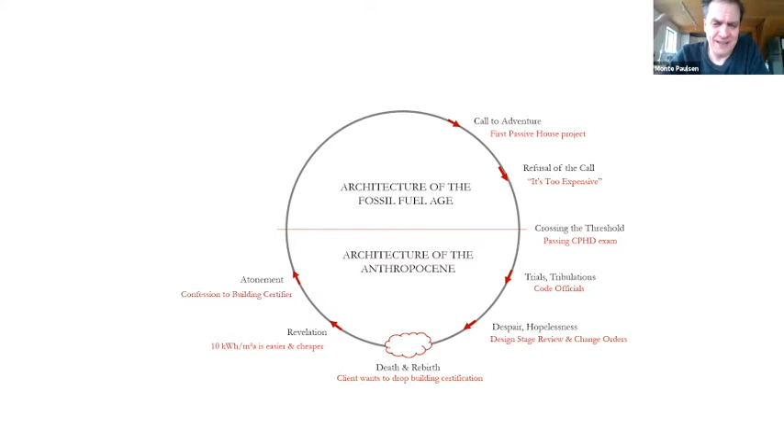Pushing the target lower than the minimum requirement generally makes the project easier, not more difficult. There is, of course, that period of atonement, much like confession. In this case, it often comes in the form of confession to a building certifier. This is what I tried to do. It didn't work. Here's what we're going to try. How can we work this out?

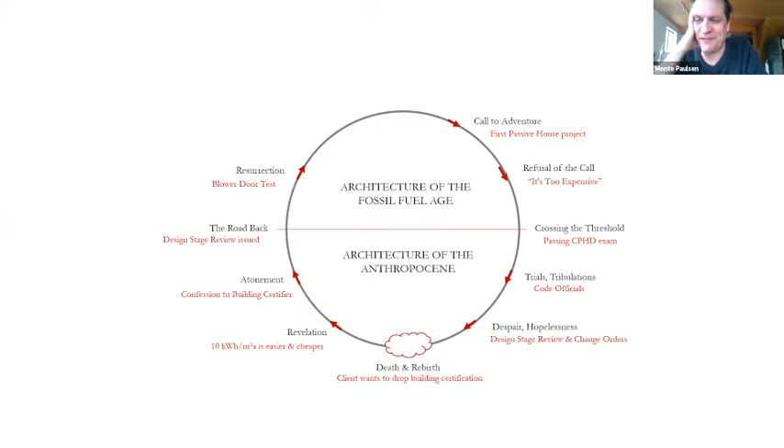The road back begins when that design stage review or pre-certification is issued. We see resurrection within sight when we finally pass a blower door test. And ultimately, we're able to return to our teams with new gifts in the form of a building certification plaque.

What I want to say is, if you have experienced anything like this on your first Passive House project, you're right where you're supposed to be. We all went through this. Our first projects were all really hard. They were challenging. They felt like hero's journeys. You should applaud yourself and feel comfortable if any of this makes sense.

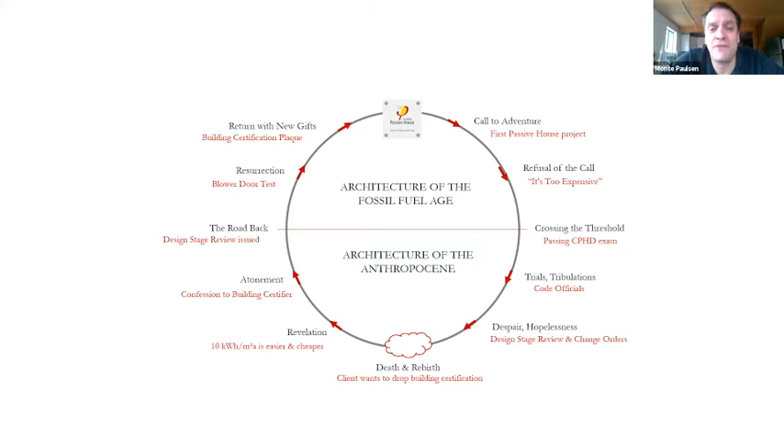The reality, as Prudence and so many others here can tell you, is there's your first Passive House and then there's all the rest. It gets far, far simpler the second time around. It gets wildly simpler the third, fourth, fifth, sixth time around. And by the time you do a few million square feet, it just seems like the only way to do anything. So I want to welcome you all, urge you to embrace the hardship, embrace the difficulty, see the humor in it, see that what you're doing matters, and give each other a hug.

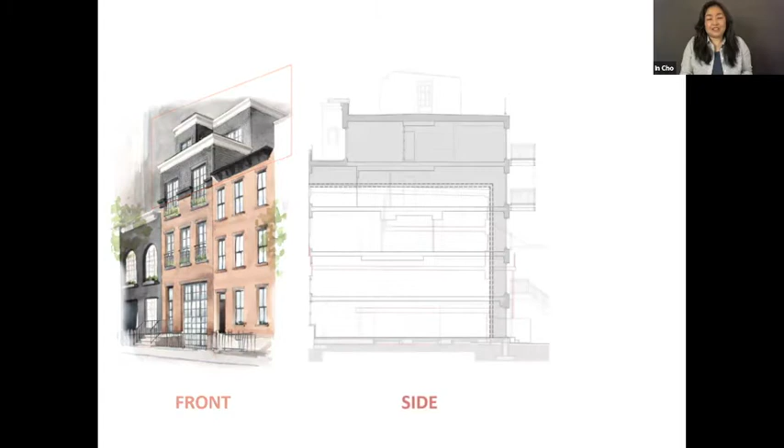But as fate would have it, just as we were finishing the bid set for the following morning, Sudha and Anil called us and asked us to increase the scope of work. And this changed everything. This led to a 1.5-story vertical addition, new increased floor-to-floor heights, and a full rear horizontal extension.

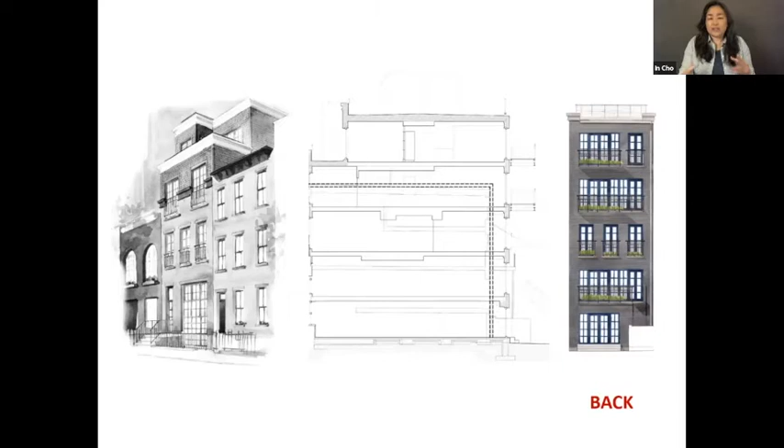Now, while it would have been easier for us to continue with conventional building strategies this far into the project, knowing that now we were more actively engaged to design the building envelope, and to address issues of building science such as preventing condensation and mold, and knowing what our clients desired the most, all of this led us to consider the significant benefits of passive house design.

And thankfully, to the open-mindedness and faith of our clients, Sudha and Anil, and with the support of the Passive House Institute, Passive House Academy, 475, and the rest of the entire Passive House community, we began our journey into this Passive House retrofit.

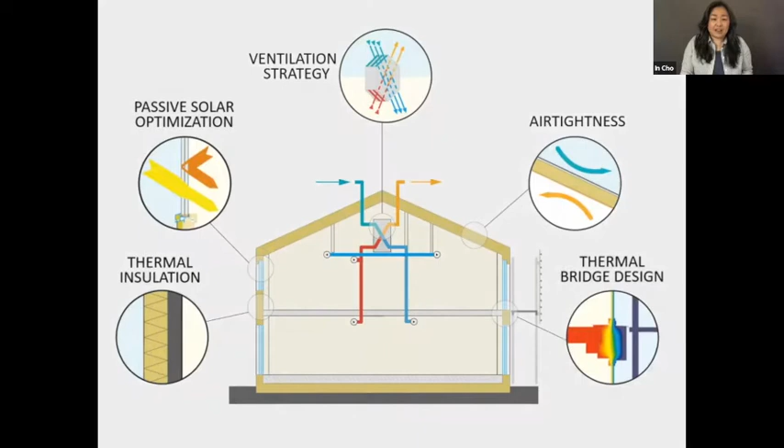Among the 5 principles of Passive House, 3 of these principles were particularly challenging for our project, and this required a lot of thinking outside the box in order to meet the requirements of the Passive House EnerPHit standards. The first of these was the passive solar optimization.

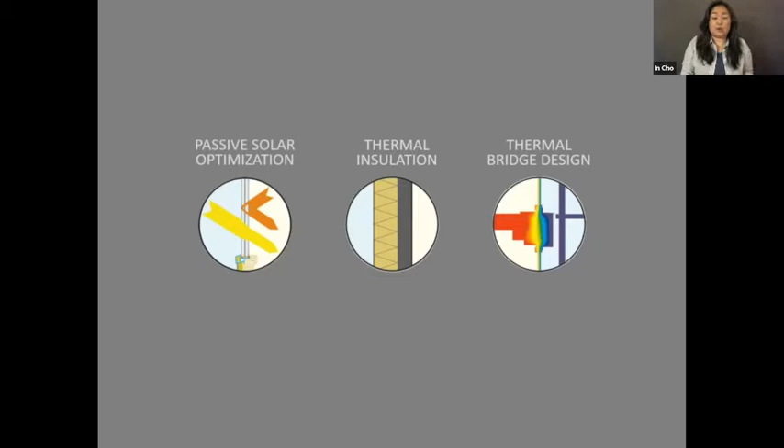Due to our 2 very tall neighbors to the south of us, we had only 1 hour of direct winter sunlight to rely on for our passive solar heat gain. And this was not sufficient to meet the full passive house requirements, such as for space heating demand, which contributed to directing us in certifying under the EnerPHit component certification.

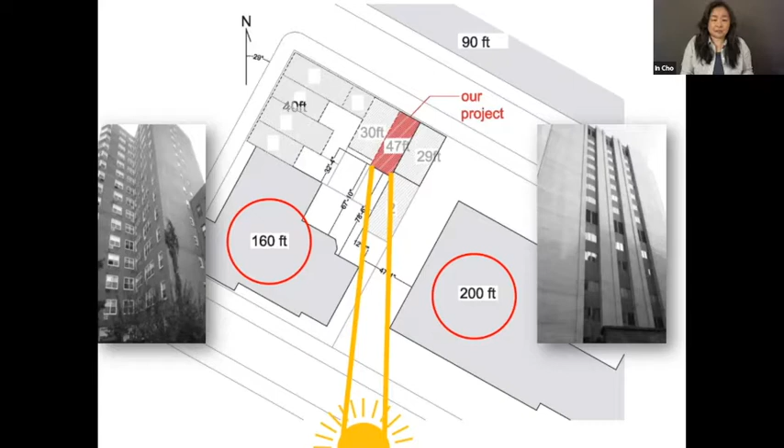And that gave us more leeway for situations that we could not readily control, such as this. It also did not meet our client's desire for abundant sunlight. So all of this placed a lot more burden on the building envelope's thermal performance to compensate for the lack of solar heat gain during the wintertime.

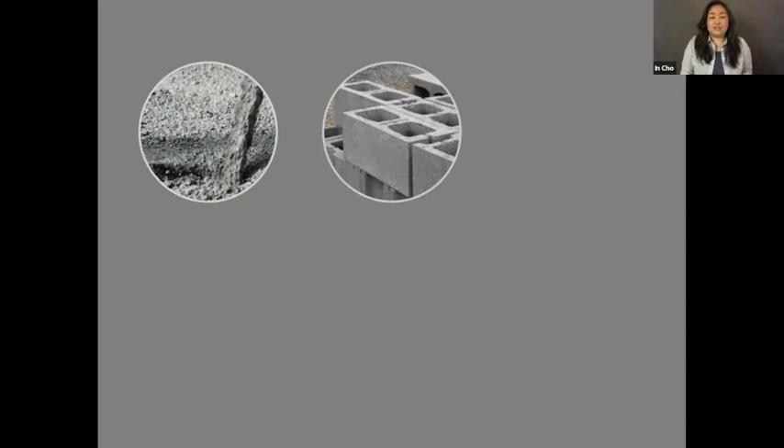So through a lot of research in our studio to address this challenge, we developed a mosaic of different building materials, different building assemblies, which were poured in place concrete, masonry units, brick, structural steel, wood and light gauge metal framing, and exterior rain screen.

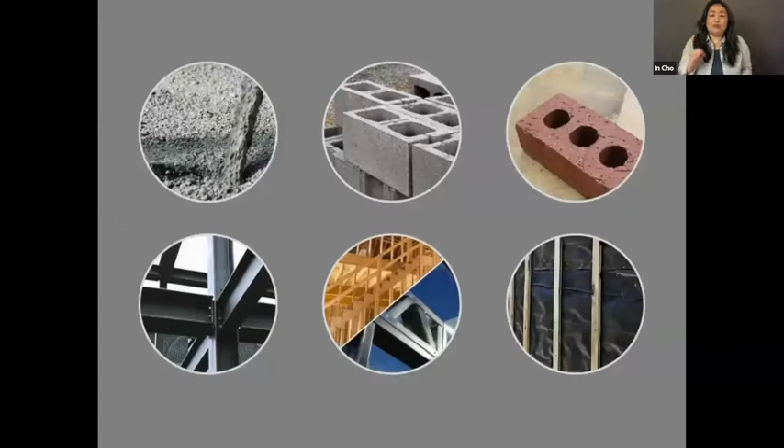Each had its own unique characteristics, which we had to carefully consider in order to optimize the thermal performance of each of these assemblies. The colors here represent 7 different exterior wall types that made up the building mosaic, so that we could maximize the thermal value for literally every square inch of the building envelope.

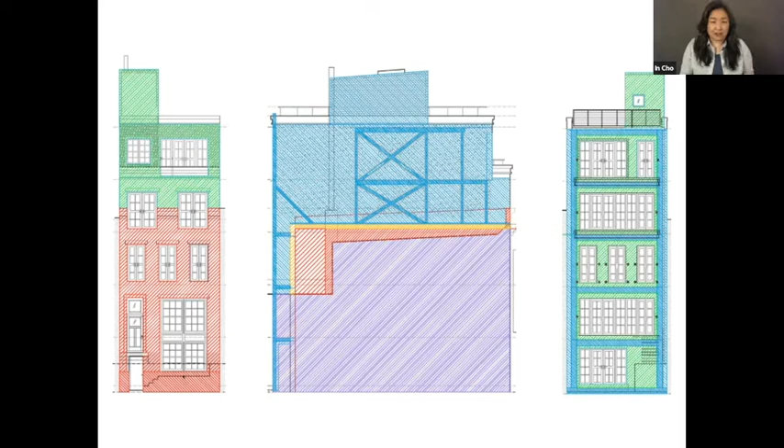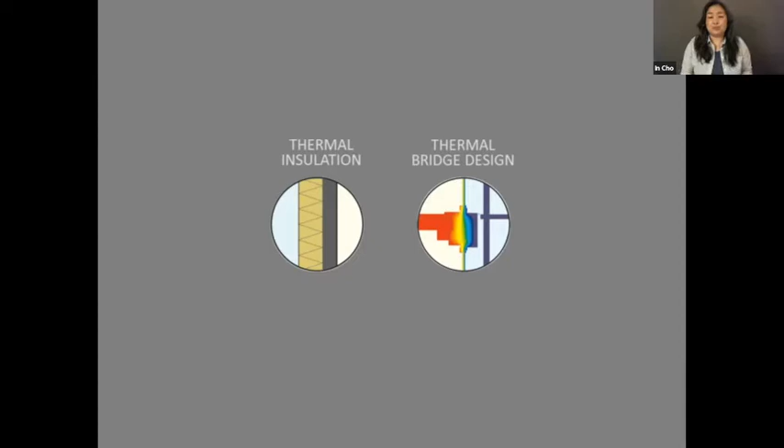The second and third passive house principles that were also of particular challenge for us were thermal insulation and thermal bridge-free design, and this occurred hand in hand. But before we could address this, we first had to structurally remediate the existing building and prepare for the new extension.

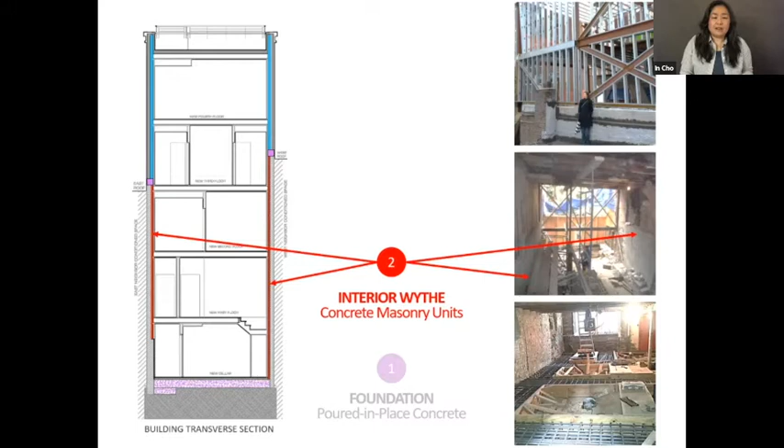And we did this with poured in place concrete for the foundation, new concrete masonry units to reinforce the structurally deficient party walls, poured in place concrete for the party wall transition curb to receive the new extension of the structural steel and light gauge metal framing.

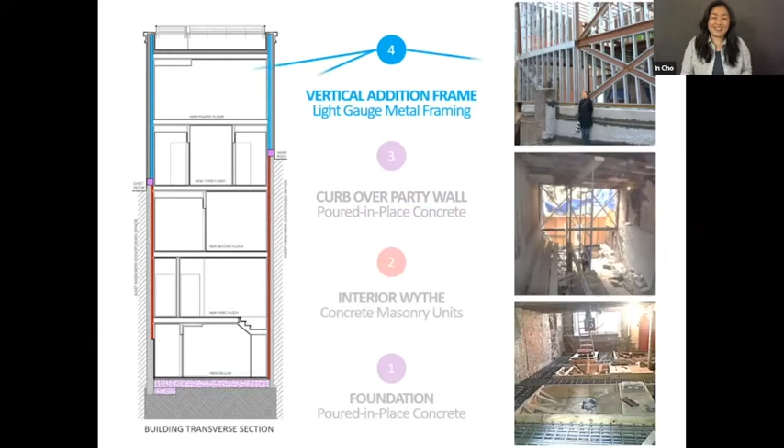So for the thermal insulation performance of the new vertical and horizontal extensions, our selection of the construction types was based on maximizing the insulative value of the wall assembly, balanced with structural and fire code requirements.

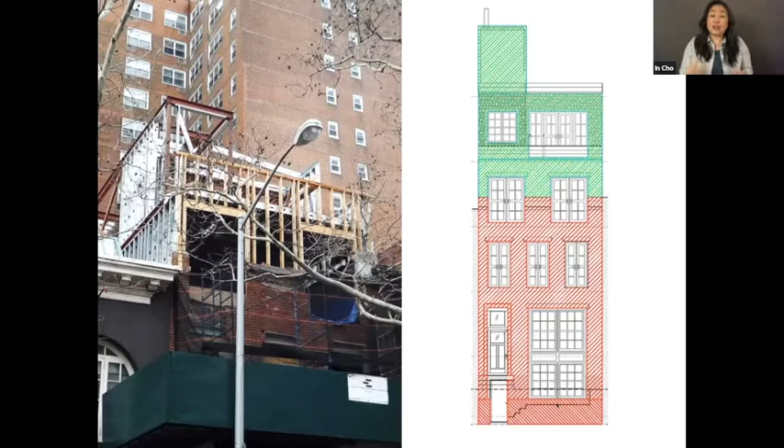So for the front and rear extensions, the building code for this project allowed us to take advantage of the higher thermal performance of wood framing. And for the rear of our horizontal extensions, structurally, we used a full height steel moment frame, and the wood was only used for the wall infills.

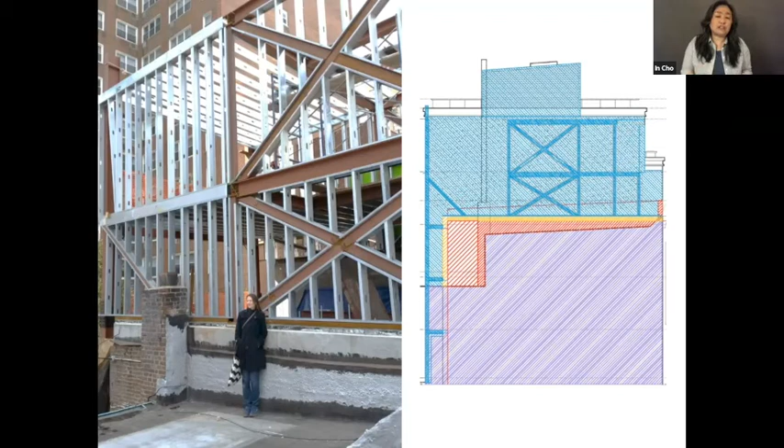For our party wall extensions, which had to be completely non-combustible by code, rather than continuing up with masonry, we chose structural steel and light gauge metal framing in order to achieve the same thermal performance as masonry, but gaining an extra foot of width in our narrow interior space of the 19 feet wide building in this Manhattan townhouse.

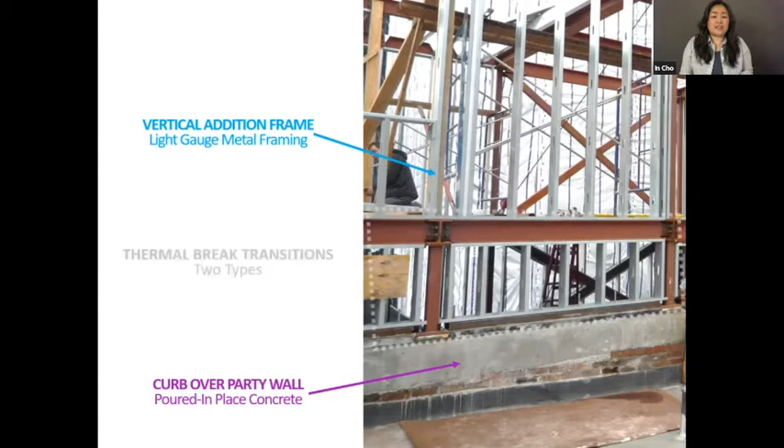Now for the third passive house principle of thermal bridge-free design, which needed to be considered at the transition from the existing masonry party wall with its new poured in place concrete curb that is to receive the new metal frame extension. We had to isolate this change in construction types with two different thermal break materials.

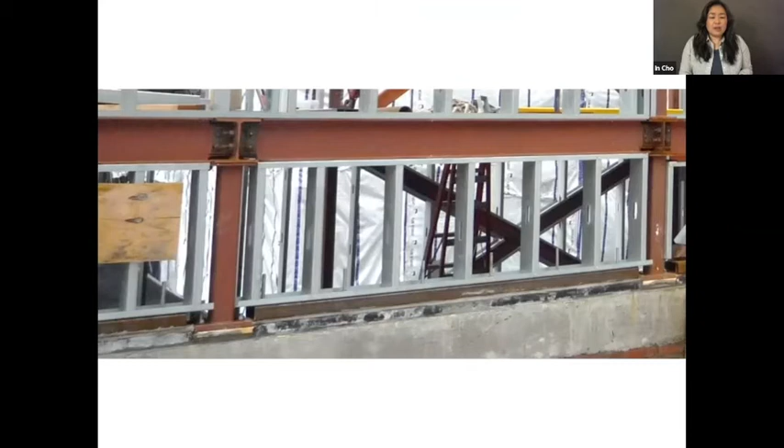We can see these two types more clearly with a closer look. For the structural steel bearing points, we used a high strength Fabreeka thermal break material. And for our light gauge metal framing, we were able to choose a different material, the foam glass product, which had better thermal performance.

But this particular product required using a steel tube to transform the point load of the metal studs into a uniformly spread load that the foam glass material required.

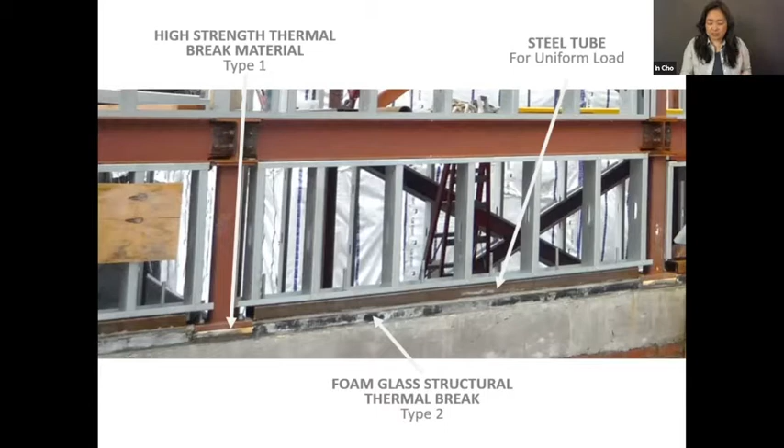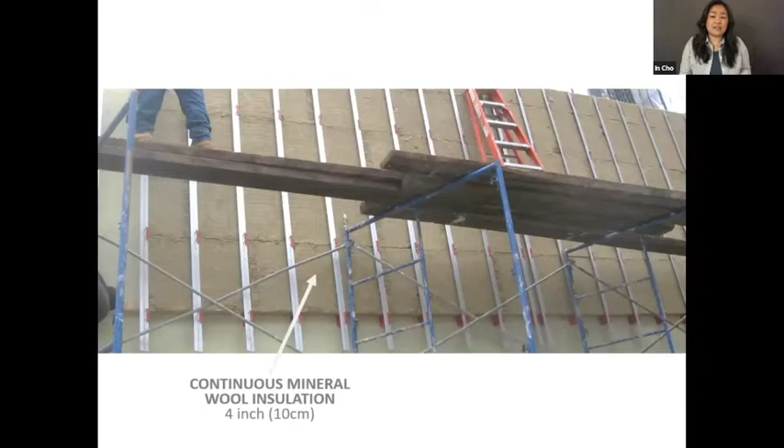And to get the full thermal performance of our new party wall extension, we used a 4-inch thick continuous mineral wool, rock wool, before it used to be called Roxul, insulation throughout. And to eliminate the thermal bridging of the fastening system for the insulation finish cladding, we chose a fiberglass-based clip system, Cascadia clips, to isolate the metal Z-girt from the metal studs.

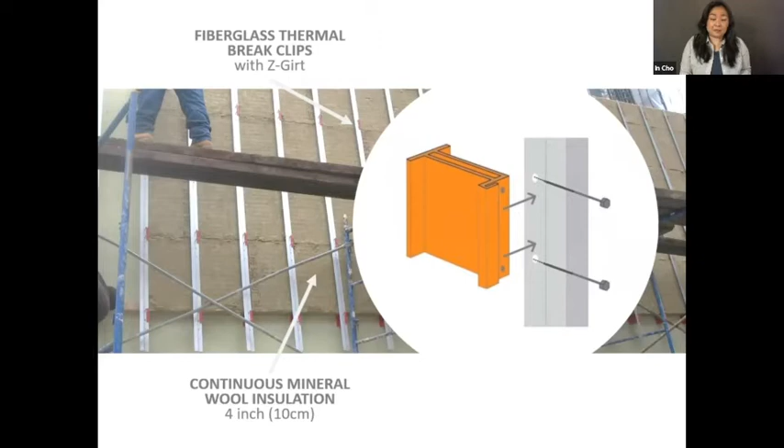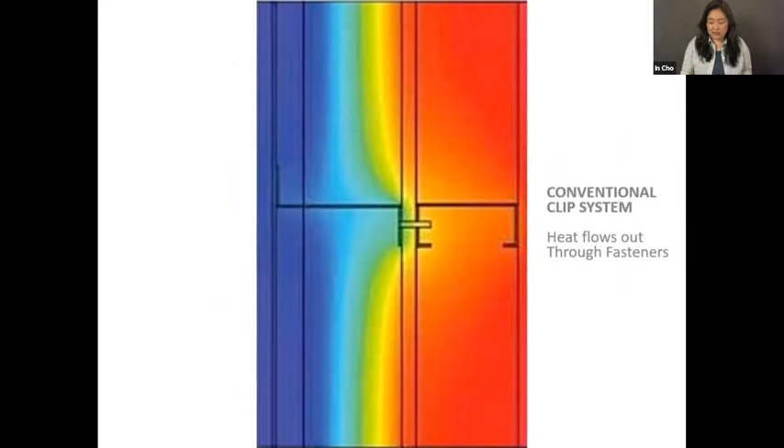Here is a thermal modeling of an exterior wall that uses a conventional clip system, where we can see the result of the heat flowing out of the building through the fasteners. And here, with the fiberglass clip system, the conduction of heat is impeded.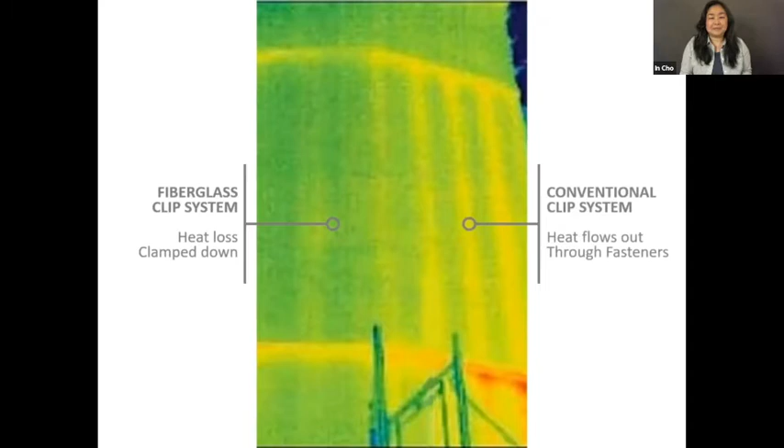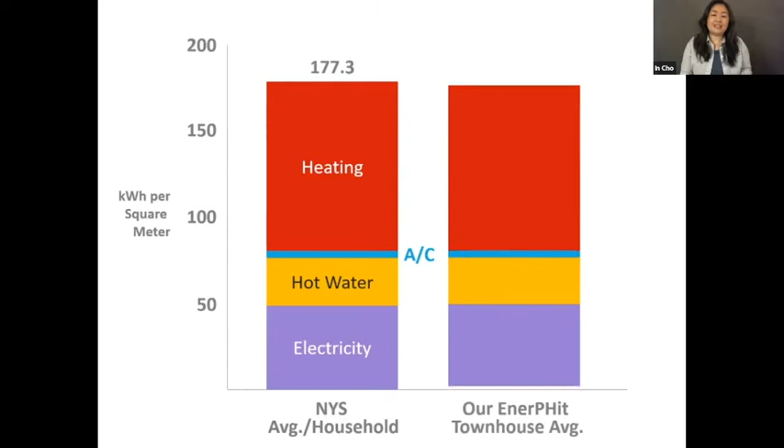So with all of these strategies in place, when we compared it to the New York State average household energy use, in addition to meeting the Passive House EnerPHit target, we also achieved a 77% reduction in energy use. And here are some of the building results.

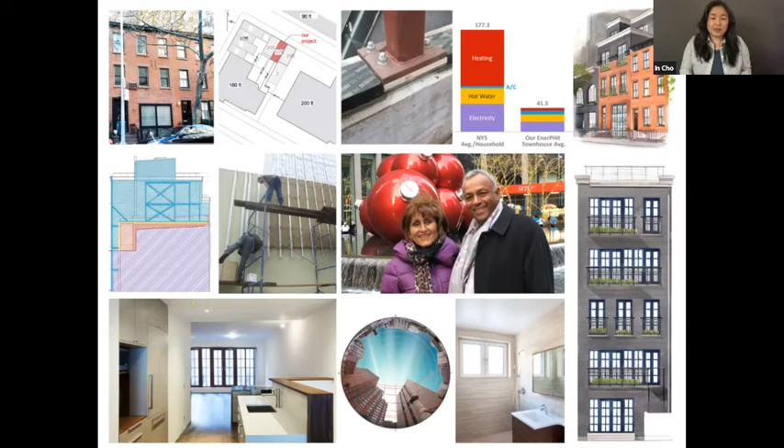And so thanks to Sudha's and Anil's trust and deep patience, we were able to persevere in solving these very complex building issues. And now, while the usual goal in construction is typically to simplify the building process as much as possible, in this case, due to the kind of complexity that we were facing, we found that a mosaic of construction types is what gave us the best result.

And I'd like to share with you just quickly a segment of Sudha, our client, speaking about her experience so far living in this passive townhouse that was created by 475 Performance Building Supply.

In a nutshell, I think living in a passive house is having the ultimate homeliness that you want in a home, and the best metaphor for it is being in your mother's womb. You're insulated, you're protected, but as yet you have everything you need. You have fresh air, you're surrounded by the perfect temperature, you're living in the perfect temperature, and you're coddled.

It's been a true privilege and seriously rewarding to hear the satisfaction of Sudha's experience living in this passive house.

Knowing the incredible benefits of Passive House, we now apply and reference Passive House as our North Star, and apply it everywhere no matter the context, whether it's the upstate New York old creamery structure we designed, or an urban masonry construction addition—you name it, it gets applied.

Not only in building designs, but also to spread the word and empower everyone to learn the benefits of Passive House, we are extending beyond our professional community and teaching at all levels of schools—from high schools to elementary schools last year, even remotely during the pandemic—and seeing how they come up with creative ideas, from dance forms to kindergartners' drawings exploring insulation, as well as a third grader talking about energy recovery ventilation systems.

And in so many other creative ways: Lego sets, models, dance movements, and drawings, just having fun exploring Passive House ideas, even creating a music video remotely during the pandemic. This really shows the resiliency of our community to learn and express Passive House ideas, and truly shows us that no matter the context, Passive House really is for everyone.

Just to help in this endeavor, I'd like to further share with you a little bit of what we learned from some of our Passive House journeys.

First, what we've learned is to really have good timing integrating Passive House as part of the first design decision, which we found to be the best way forward, much less headache, unlike how we approached this project—